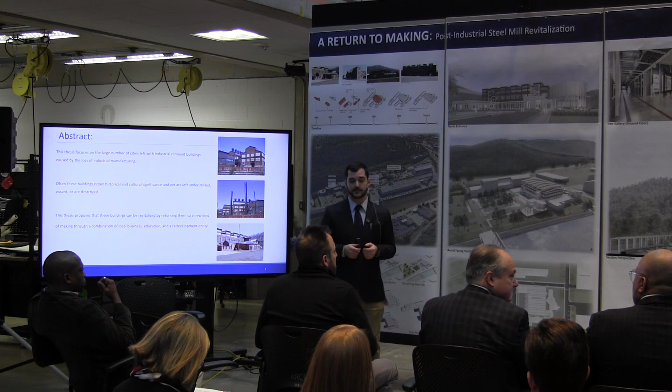So to start off, this thesis is about adaptation. It focuses mainly on a large number of industrial cities that have been left with remnant buildings as their industry has failed or gone away. Many of these buildings hold historical and cultural value for that city, but are left underutilized, vacant, or destroyed. This thesis proposes that we can revitalize these buildings through new programs such as educational, business, and maker spaces. As a case study, we'll be using a steel mill machine shop in Johnstown, Pennsylvania.

For an overview of what we're going to talk about: we're going to start with the site, some site analysis, building analysis, move on to the design solutions, and then follow up with where this could go on site, as well as other places.

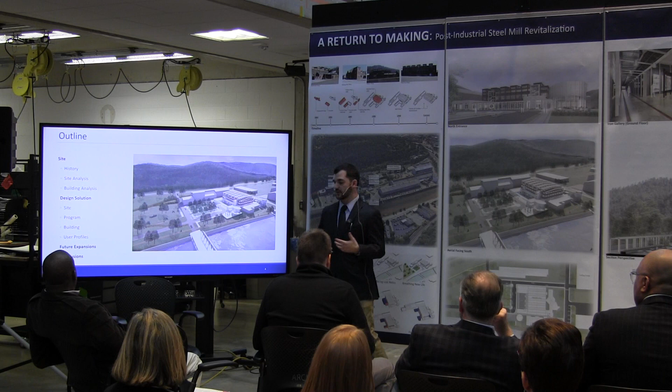Johnstown, Pennsylvania was left with over 200 industrial acres at the end of the steel mill era. These 200 acres were spread across 4 separate sites. Specifically, we'll be looking at the Lower Cambria area, which is the oldest site and home to the Cambria Iron Works. Additionally, this site is a registered location.

The site to the south is the Johnstown Welding and Fabrication buildings, which basically make parts and custom fabricated steel products. At the center of the site are 4 main buildings from the late 19th and early 20th century. 3 of the peripheral buildings are being occupied right now by the Center for Metal Arts, which is basically a learning center for blacksmithing. At the center of those is the machine shop itself.

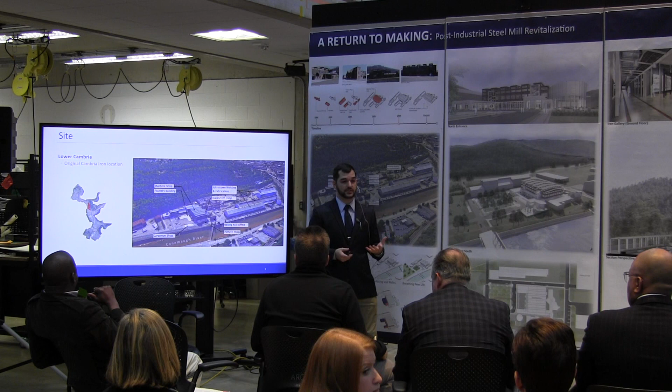Additionally, there were 2 buildings that were left at the end of the steel mill era when it closed. However, they have been destroyed since then.

In 1793, Joseph Schantz established the town of Cambria in Pennsylvania. Soon after, they would rename the town after him, but due to mispronunciation, they would call it Johnstown instead of Joseph Shantz.

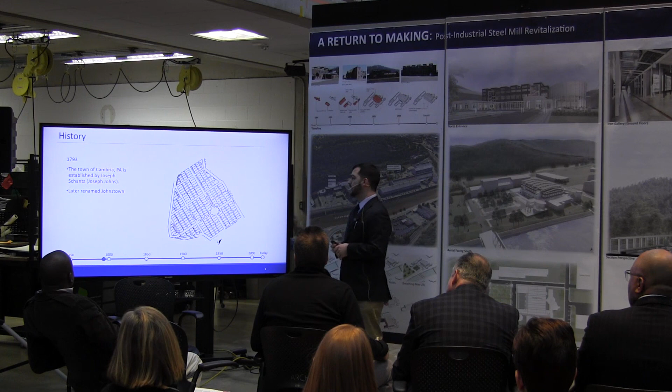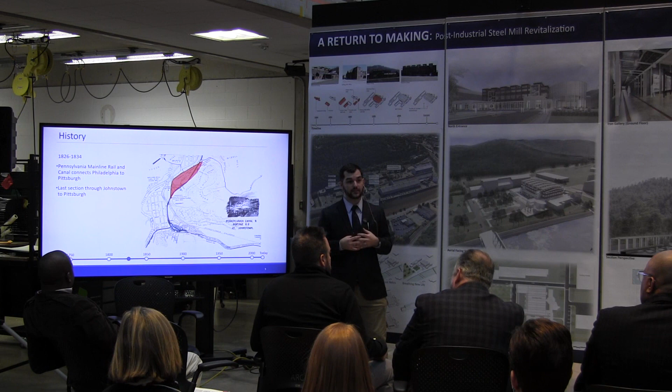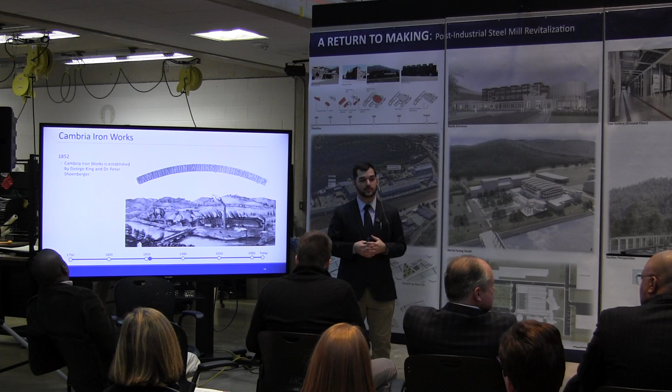In 1852, soon after the canal system, the Cambria Iron Works was established. This would later grow to become the largest steel manufacturing plant in Johnstown.

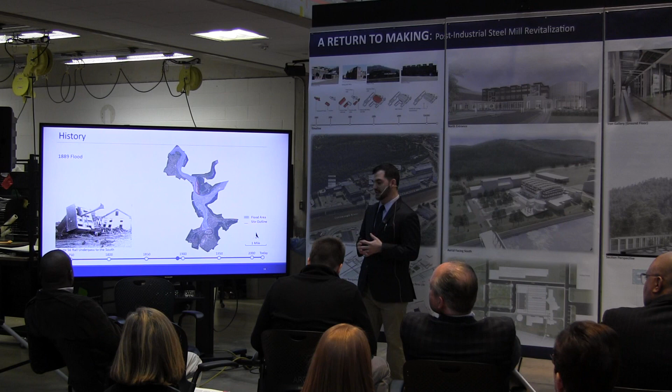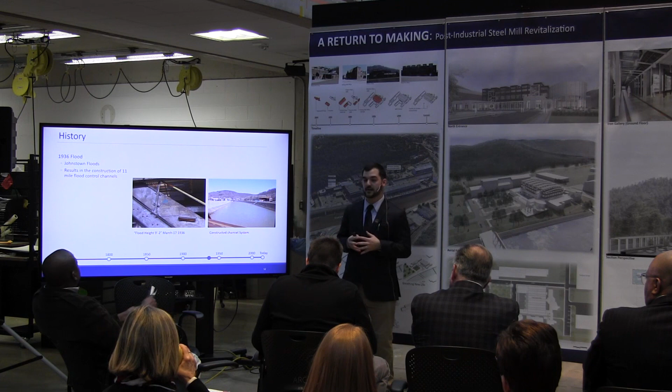Unfortunately, in 1889, due to the collapse of the South Fork Dam, Johnstown flooded and killed over 2,000 people in one day. The city would flood again in 1936, which would result in the construction of 11 miles worth of a channelized river system.

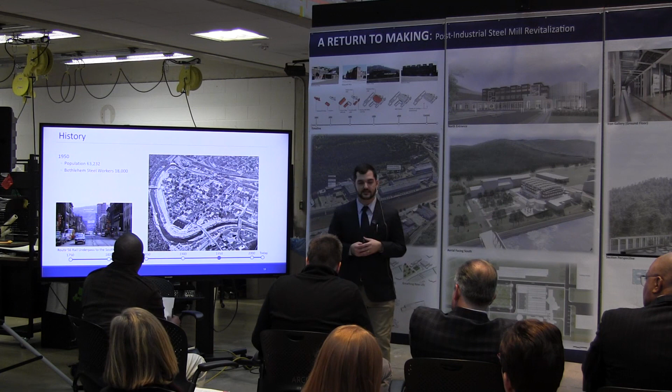That brings us to 1950, at the height of the boom of Johnstown. At that time, the population was just over 60,000 people, with 18,000 people being employed by Bethlehem Steel, which was formerly known as Cambria Iron Works.

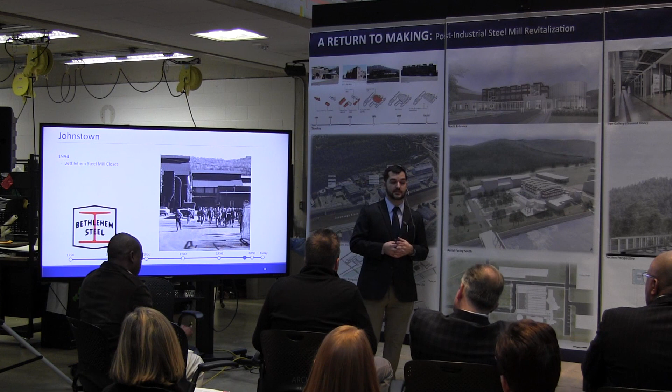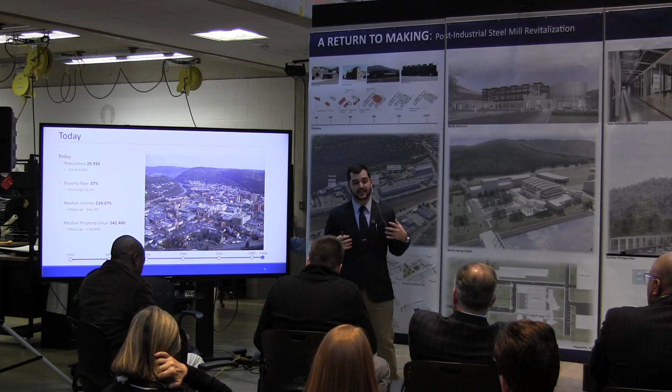That leads all the way up to 1994, the end of the steel mill era in Johnstown, when the mill closes. This leads to today, where the population is 1/3 of what it was in 1950, and this has had a tremendous amount of economic repercussions to the city.

Focusing on the site of Lower Cambria, it is located at the confluence of two rivers. Just to the northwest is a series of low-rise commercial buildings, churches, and some residential buildings, as well as, just to the south, the center of the city.

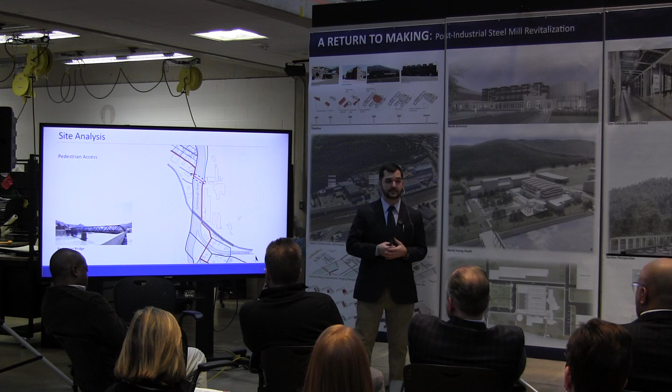Pedestrian access is primarily through a bridge that was constructed in the late 1800s, to allow the workers to walk and get to the site from the adjacent housing places.

That leads us to other forms of transit, primarily through the Amtrak station to the south, just across the rail viaduct, as well as a number of bus stops that would stop at the pedestrian bridge.

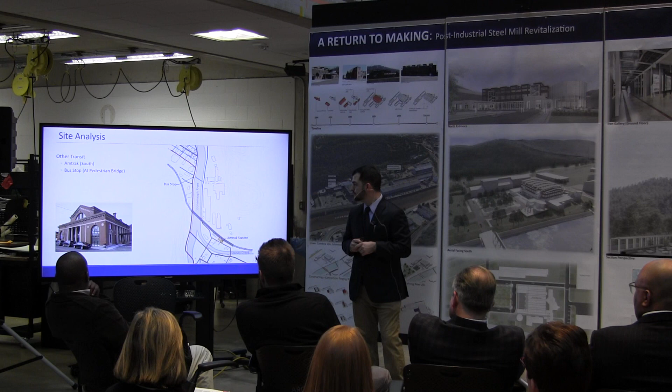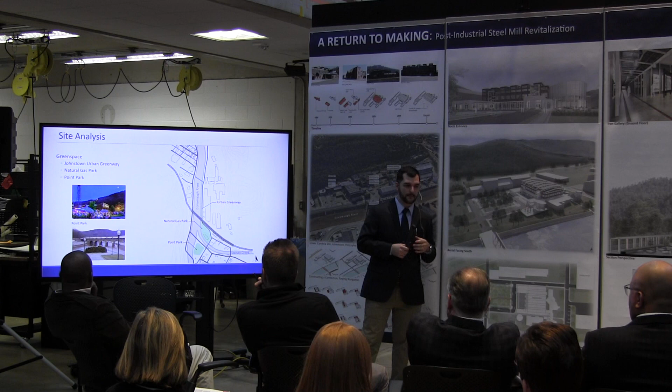Green space surrounding the site has three main forms: a green space, or the urban greenway, which snakes along the river's edge and the site, then down into Natural Gas Park, with Point Park across the river from there.

Looking at the machine shop, it has primarily been left vacant since the end of the steel mill era, and provides a large space at the center with a cathedral-like plan, with a bay at the center and two side bays that allow for additional floors on the ground floor.

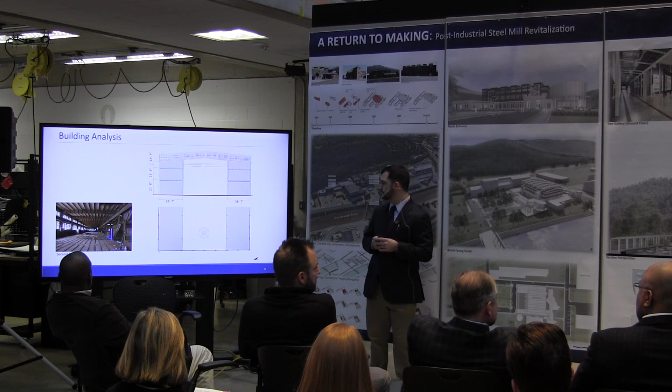Moving to the site and the solutions for it, there are four main objectives. The first is constructing a connection to the site, since it's very difficult to get there and very isolated. This is done through a bridge connecting to Route 56, as well as rerouting Iron Street so it can be wider and easier to navigate.

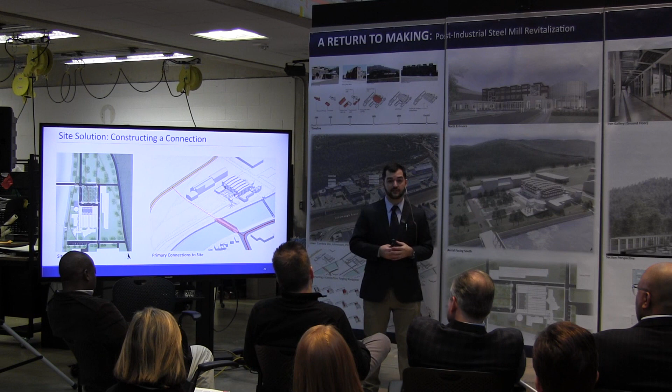Additionally, constructing a navigational system of streets on the site to provide more access to the buildings.

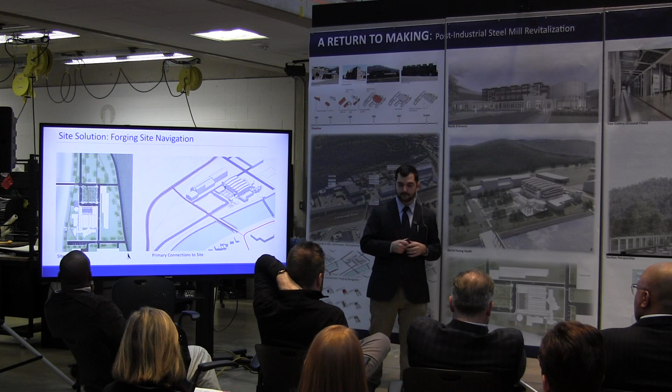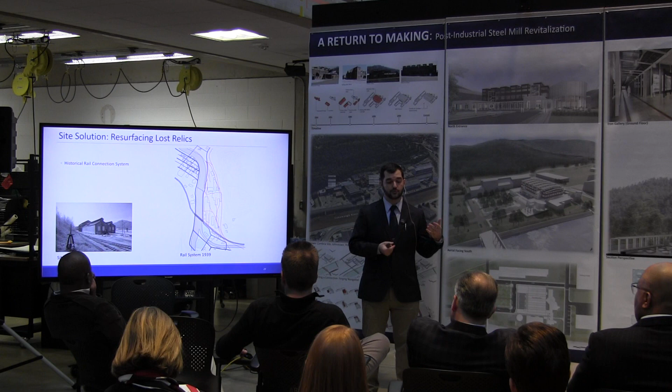Another objective was resurfacing some of the lost relics on site. Looking back at how the site was navigated through rail, they primarily used cars on rails to move all the products, the heavy steel, in and out of the buildings there.

Using this to then create another network of pathways, both vehicular and pedestrian paths, as well as plantings and some planter beds.

The site, being industrial, has little to no green space. So providing green space in the form of a pervious pavement area, which can serve as a place for farmers markets, as well as overflow parking for any events inside the space.

And then to the north, providing a sculptural garden space for any of the things that might be made inside, or any artistic things.

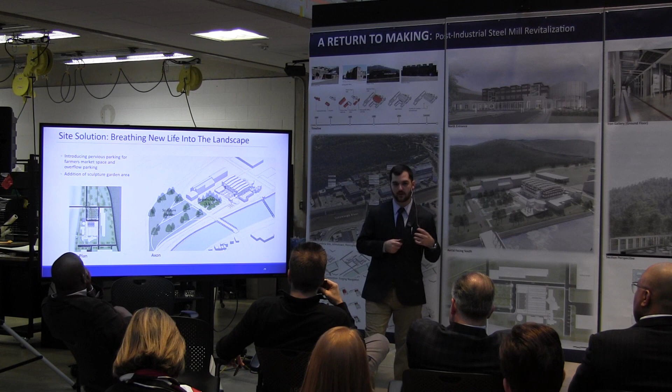Moving and transitioning to the building and solutions there, there are three main constituents for the program: using an educational system, the redevelopment authority in Johnstown, and bringing together corporations such as maybe the Johnstown Welding and Fabrication plant that's on site to use this space.

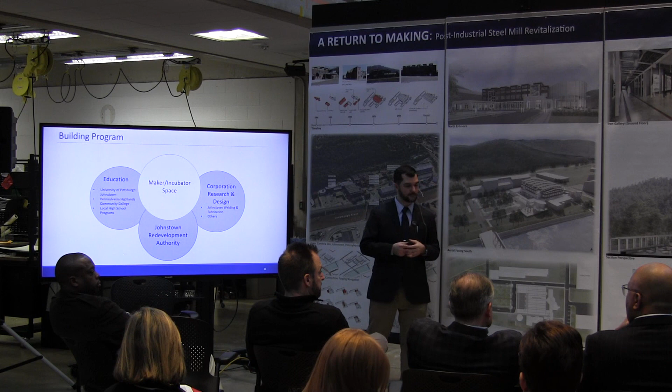Looking at the building and how to adapt it, how to add spaces to it, or implement and insert this program into it, I came up with a series of different ways we could do that, which led to two different schemes.

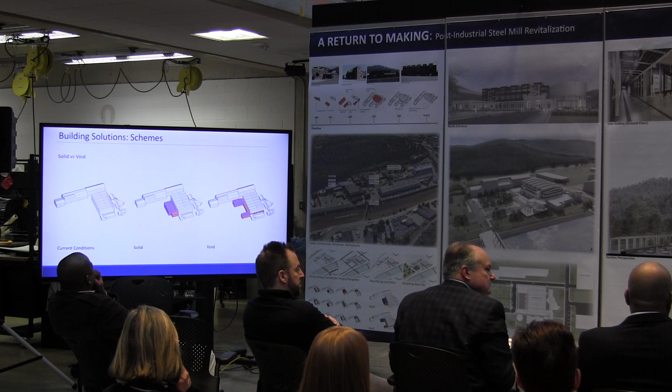They're mainly called these because of the response to how the foundry building, which was formerly adjacent to it, was treated—whether it became a void or a form, or whether we recreated it as it was.

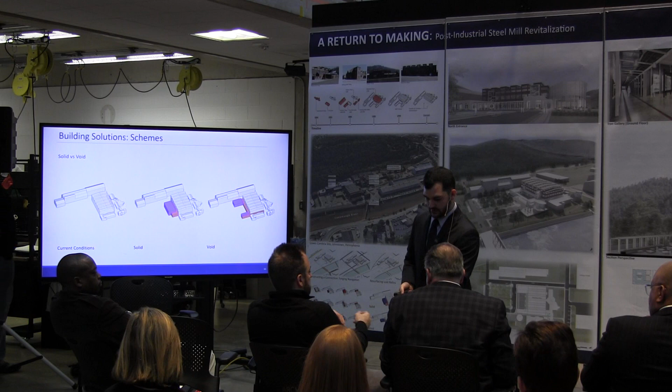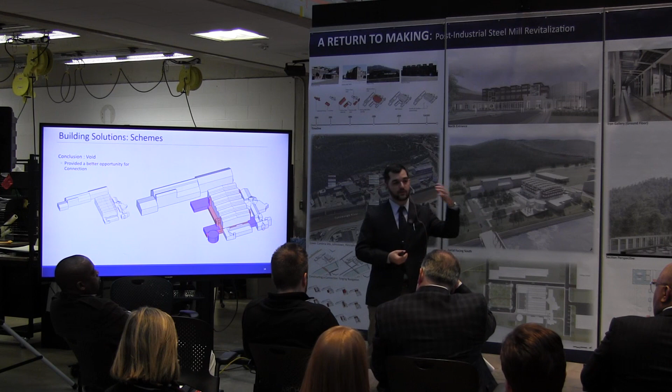I created a couple models to look at this. This led to the void form producing a better opportunity for connection between the green space to the north and the industrial side of things to the south.

Moving to the building objectives and what I wanted to achieve in the building: it starts through this connectivity, creating a long axis that runs from north to south, allowing anybody who needs or wants to walk through it to get there, as well as providing a means of travel to the spaces they need to reach.

Additionally, providing another axis on the periphery of the north side of the machine shop from east to west.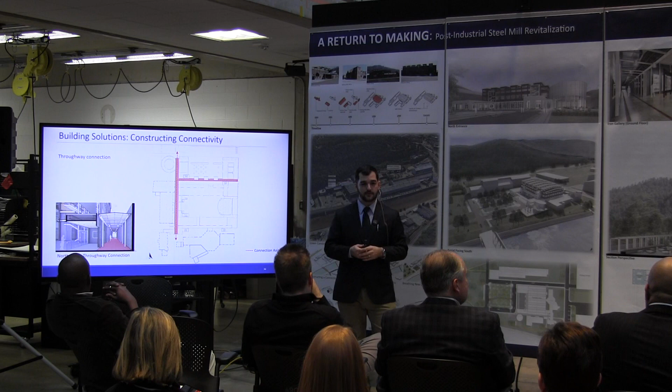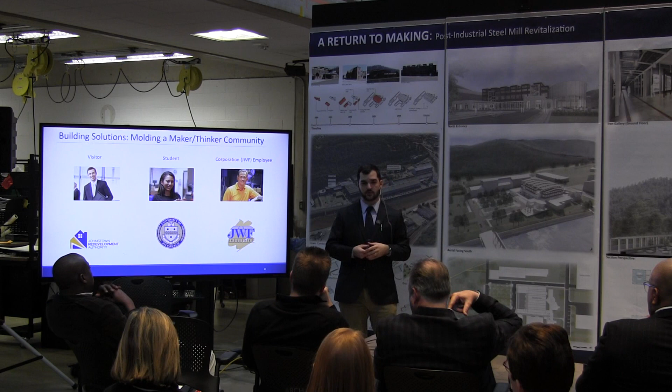So just to look at the community that's going to be in there and who's there: visitors, anybody that's coming to a large event space that's going to be in there, as well as students and JWF employees or business employees, startup companies, stuff like that.

Mainly you would start by coming in the north for most people, and you'd be greeted by the Steel Gallery or the cafe that's there. Then you could move across to the opposite side of the foundry court, where there's a shared workspace for any startup companies that would like to take place in this building.

And then at the center and at the heart of this complex is the steel hall that provides a vast, large open space to hold any kind of conventions or to serve as a breakout space for the maker spaces that are on the periphery of that large space.

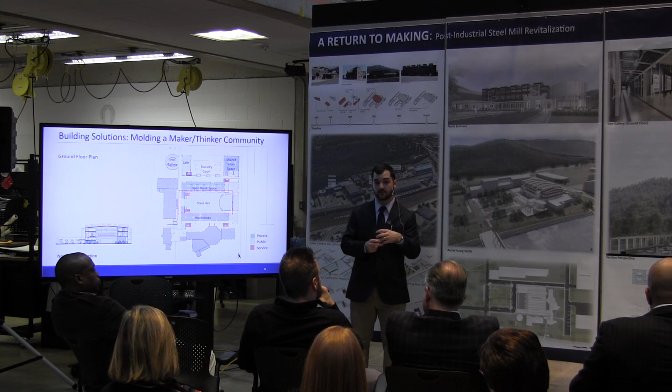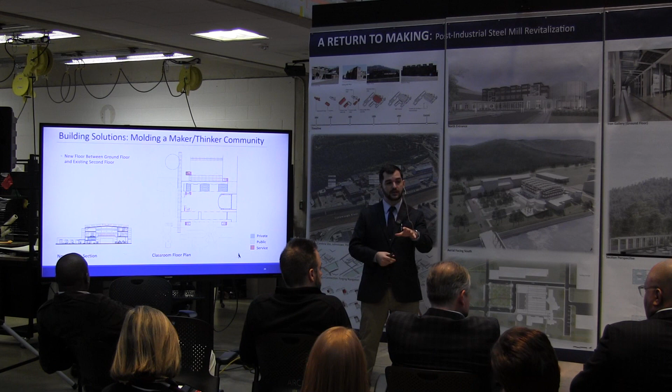So then moving between the ground floor and the second floor, the existing second floor there, a floor was added to the north side to provide some educational spaces that allow for connectivity. It's a catwalk-like space, which I'll show you a little bit later, that you can see the connection between what's going on inside the classrooms and down into the open workspace where people are assembling any kind of projects that they have.

And then this would move up to the second and third floor, which are outfitted with a flexible office space, which we'll talk about next.

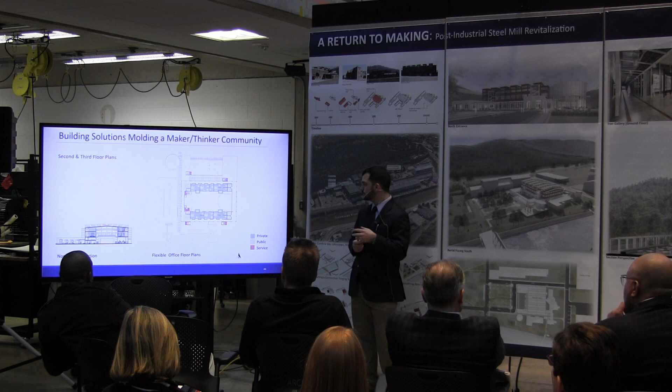So to start that off, I want to look at the way that this thing was constructed. It was primarily constructed with riveted steel columns and beams with a brick facade on it, and concrete roof and a concrete floor. These basically have no insulation value to them.

So providing a space in which we can condition and add an envelope inside these buildings for the office spaces that are there.

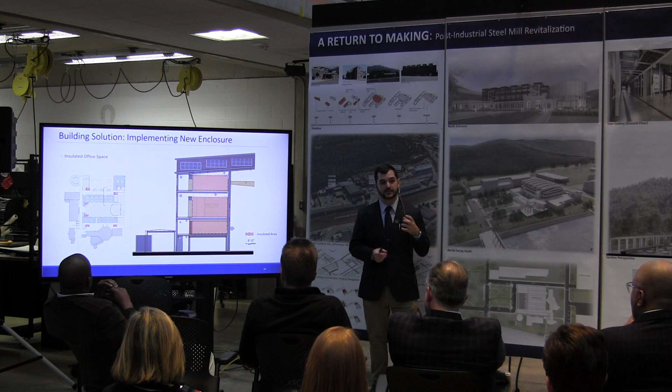This is constructed through 6-inch structural insulated panels, then moving to a suspended ceiling from the existing structure that also has insulation on it. Then providing a raised access floor that gives any kind of services or access to any services and allows for flexibility throughout these spaces, and additionally some insulation completing the envelope.

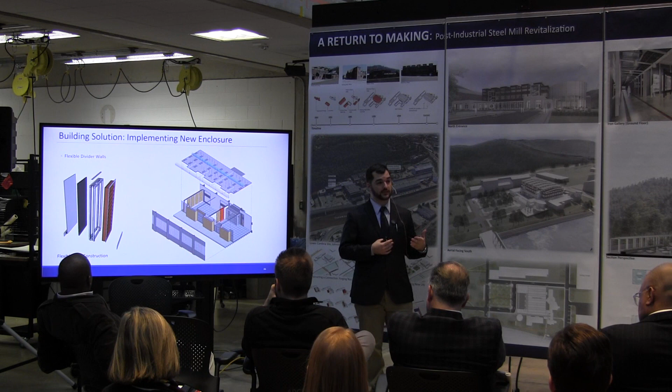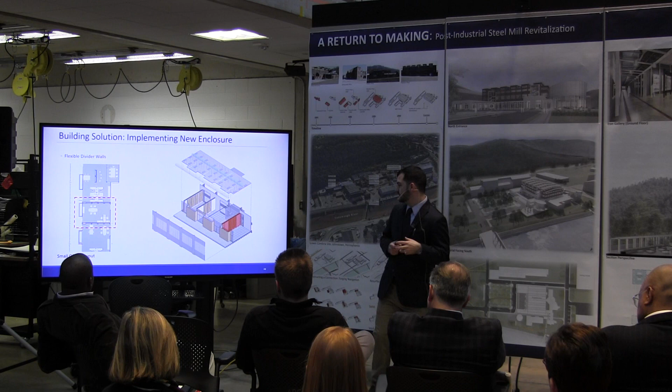Within these office spaces, I was looking and trying to provide some flexibility within them, so developing a wall system that can be moved and easily adapted as the building grows and contracts. These wall systems are primarily made out of some baffling and some steel structure there, but are left on casters and have a locking system on the top where it will lock into a C-channel in the ceiling.

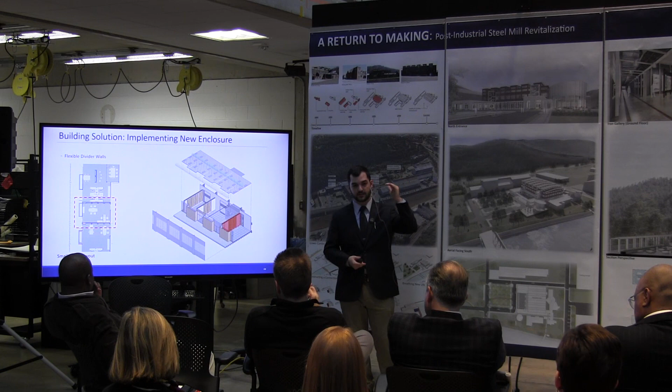So then moving to the last building solution, primarily this is trying to contrast what's going on from the old and the new. To do this, again, looking at the weathered and worn structure of the brick, as well as the riveted steel, I contrast that with the warm feeling of the wood and the wood texture, as well as some concrete on the base floor, creating a base there, as well as adding some additional glazing and contradicting the steel structure that was existing there, which was riveted I-beams with a tubular system or hollow steel system.

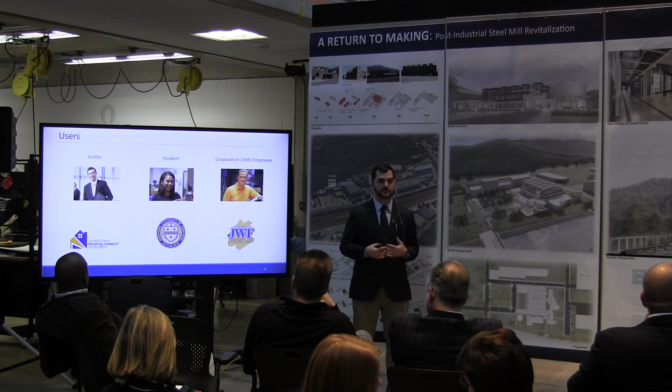So going back to those users and how are they going through the space and how are they using the space? We'll start off with the visitor who's going to enter through the north entrance.

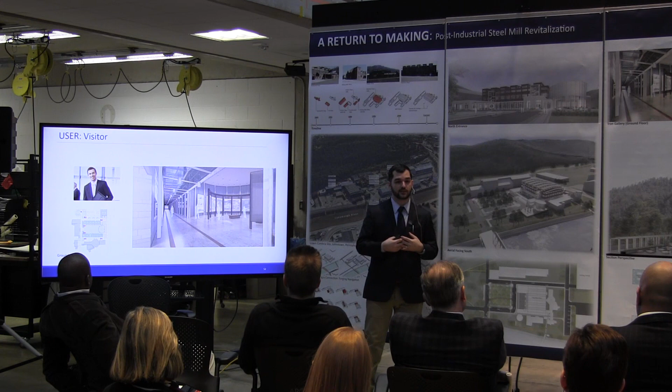Then they're going to be greeted by the steel gallery where they can enter and see how this space used to be or used to function. They can see all the activities that used to be there through images or any other artifacts, since there's an abundance of museums within Johnstown, so they would be easily used and traded for.

And so after they're there, they can then move into the large gallery or steel hall, which would provide a space for any kind of conventions that they're most likely attending.

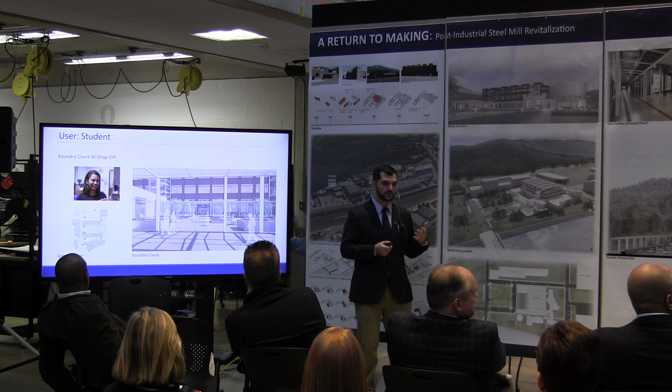So then the student, and how are they navigating this space? They would most likely be dropped off at the Foundry Court. Then they would enter into this space that serves as a kind of open workspace where they can go get their coffee, sit there and work and study a little bit, as well as any of the other people, the business people, individuals in the space can use this also.

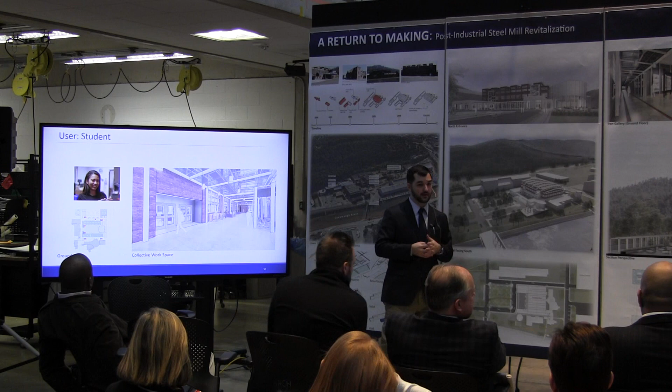Then they would move up to their catwalk system that I was talking about before, where they're raised above a workspace down below. With a high bay and low bay system between these classrooms, they can see into the classroom through some of the glazing, and then down into the space below and the projects that are going on.

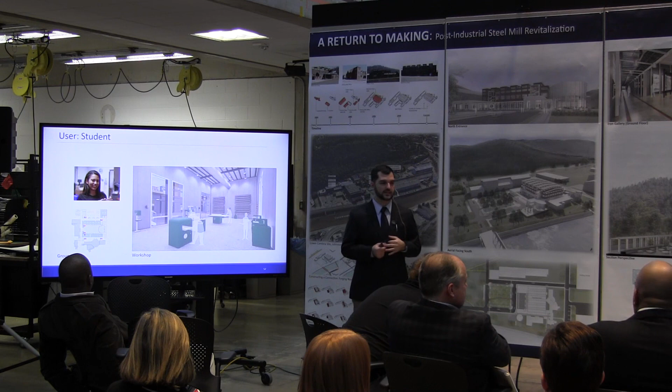So after they're in these classrooms and have had some instructional time, they can then move to the workshops, which there are two types of: a steel workshop as well as a wood workshop. Additionally, there would also be some 3D printing spaces in the building.

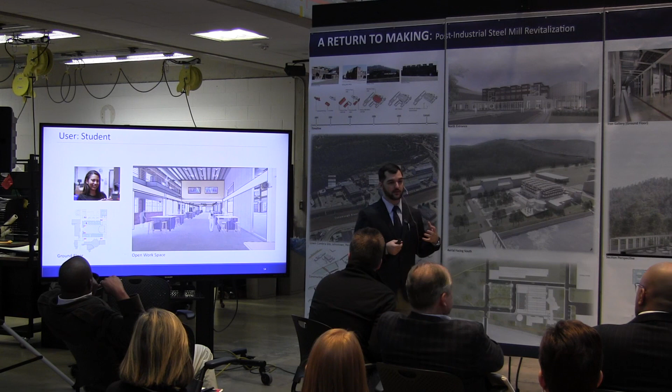After they've constructed or cut out these pieces, they can then go over to the open workspace where they can assemble whatever their projects are, or work together with any group members, using some of the hung marker board systems that are movable, as well as any of the breakout spaces.

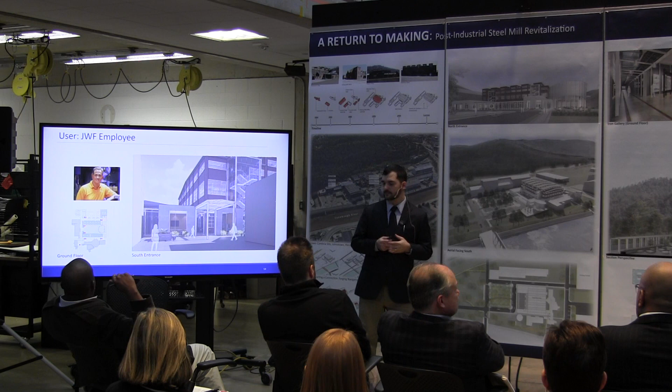So the last individual we'll talk about is the corporate employee, and they would most likely enter through the south of the building. They would then move into their flexible office space for a while, and then maybe that day they have an instructional learning event, and they can use the space inside Steel Hall as a presentation space.

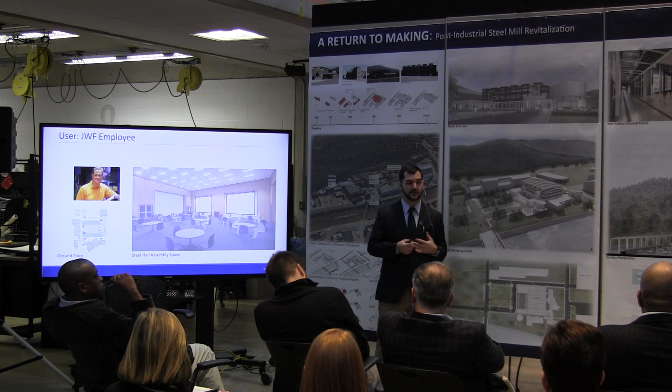So wrapping up with that and looking at how we can expand into the other buildings adjacent to there: most of these buildings on the site are similar in construction to this building, although they may be a little smaller. You can utilize the modular, flexible office system that provides an envelope in these buildings, as well as these buildings lending themselves to the makerspace kind of program.

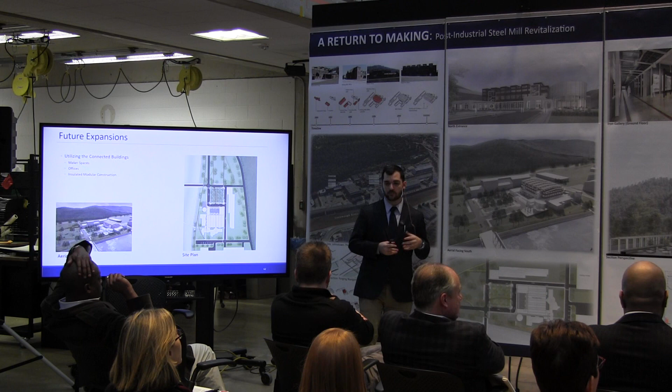So wrapping that up, this thesis has provided a means in which we can revitalize these post-industrial remnant buildings through the implementation of an educational makerspace and some business incubator programming. Thank you.

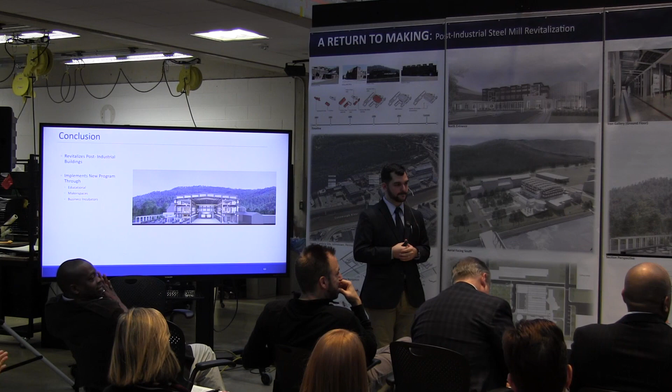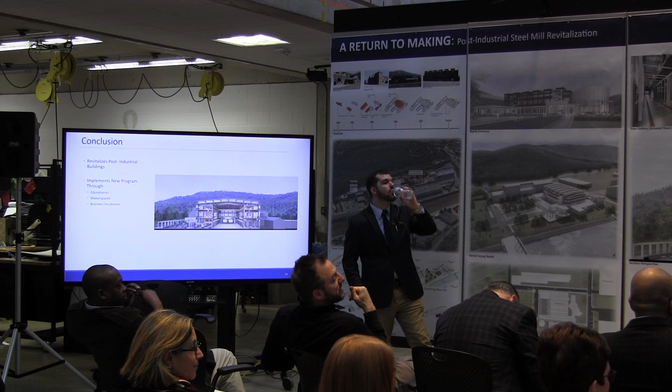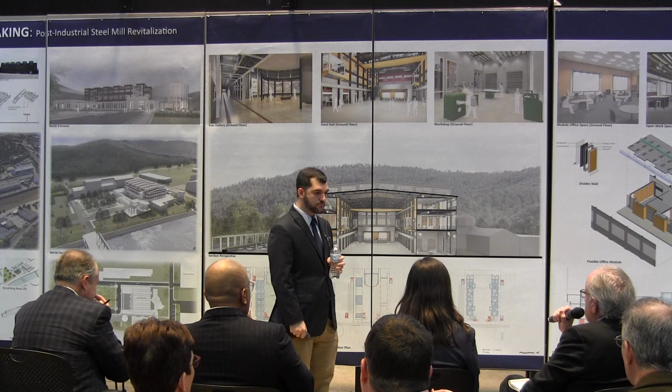In general, it's a very nice project. I do have some questions about that main space in the middle. It's how tall, 60 feet? It's like something 72, 70, something like that to the highest peak. How tall is this space?

Good question, I never measured. But it's shorter than what I have, I can tell you that.

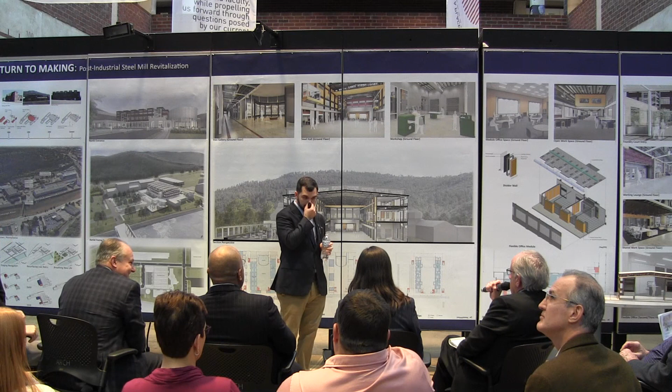You talked about that space being for breakout as one of its major reasons, but on the upper floors you put the circulation on the outside face and not the inside face. And as we've noticed here, that hallway is a major breakout space—it's where people leave the classrooms and look back down into here. It engages the upper floors and, for better or for worse, the breakout space. I'm just wondering why you put the circulation on the outside.

So putting the circulation on the outside, I think, was a way that the exterior walls weren't conditioned as well, and so to leave the aesthetic of what the existing structure is there, so that you can walk past these walls and see outside, additionally into what would be the court out here. So you get a view outside instead of, and additionally not touching the existing structure as much. Moving it to the other side allowed me to not impede upon the existing structure as much as what would be needed if I moved it to the opposite side.

So these walkways on the outside aren't conditioned as well as the ones on the inside. However, to provide views, there are these what used to be loading bays—overhead cranes would come over and drop things on there. So there's a conference room or an office that could be there, as well as it all provides a number of glazing along it that allows you to see into the office. I think that's a fair answer.

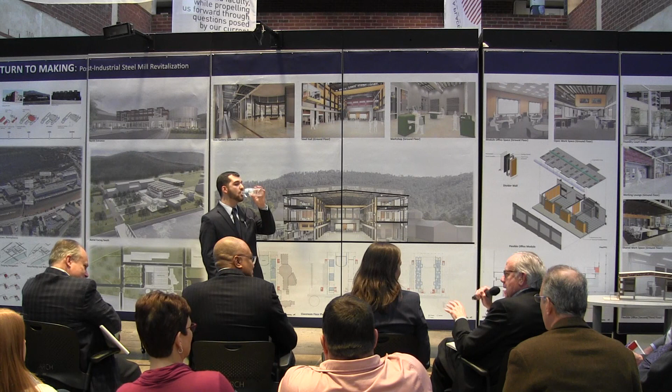So the comment you made about having been to the steel plant, we also went there when I was a student here. You're kind of bringing back memories as you talk about this. And it's funny, my major memory of being there was how many people working there had less than 10 fingers. I mean, it was a brutal place.

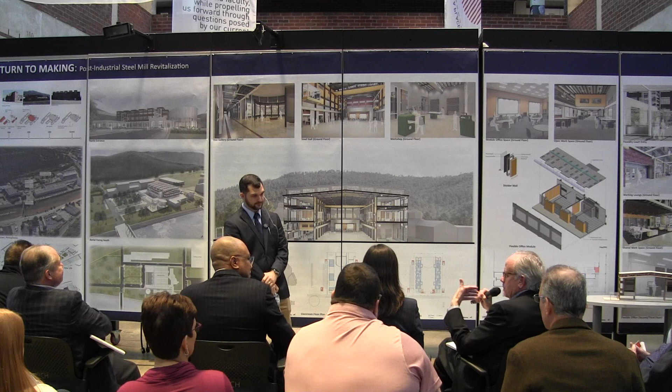It was, yeah, it's nice, and it's been cleaned up. And I'm wondering, it's one of these things you deal with when you want to clean and sanitize history—where do you cross the line where it becomes something very, very different? And I think it's too sanitized.

I'm not sure the floor looks like a very light terrazzo—I'm not sure that's the appropriate floor. What you have inside the space would be left with the existing floor? Yeah, it's meant to be left, so out here it's a polished floor, but when you get in here it's still the rough floor. What's that material—concrete? Yeah, it's rough concrete.

The renderings don't show that—did the walls look like this inside the space? No, so they wouldn't have that color; they're all concrete, or they're all brick. So anything that's not a brick wall is a new intervention.

My point is, all I can think of—this is going to sound odd, because again it's a nice project—is that it kind of has that food court feel, overly clean, overly large, overly bright. Maybe the lighting shouldn't be quite so bright; it needs something a little grimier, something that talks about how brutal this place was when the steel was actually being made. It could just be a function of adding a little more grit to the rendering.

It's interesting, because I was recently on a jury for a museum award—not really an architecture award—and two of the submissions were the Brooklyn Historical Society's Dumbo space and Mass MoCA's Building Number 6 in North Adams, Mass. What both of those projects did really well was leave artifacts of the people who used those buildings when they were industrial.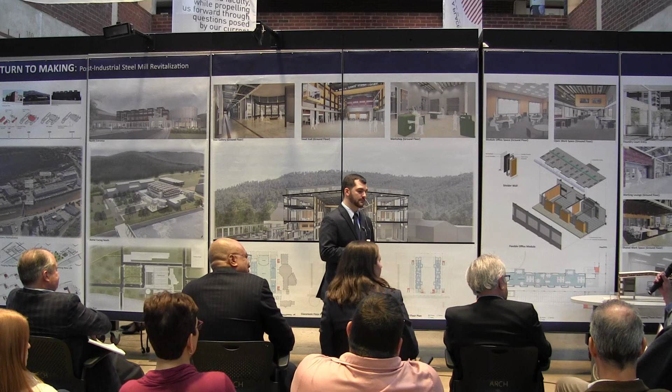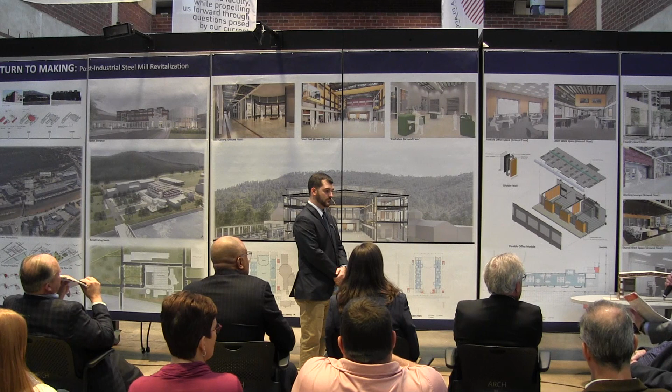Not to sound like a broken record, but what your project is missing, and otherwise you've done a lot of good things very well, is detail and materiality of your interventions. I keep getting drawn to the center drawing there, and the mustard color wall, or whatever it is, that I assume is something you added, right? Between the steel grid, which I assume is original, the vertical grid, whatever. I think it'd be interesting to divorce your mustard yellow walls from the steel and let the steel say this was an open steel thing, and then make that wall out of cable netting truss, glass panels, spider fittings, something really of today and high tech, to contrast it with your century older original stuff. Leave the chips of paint on the brick walls and on the interior and stuff like that, and really play off today versus history, and just think about some of the details. It would have made for a much stronger, more interesting project, and would have given you a reason to not put the balconies on the interior part.

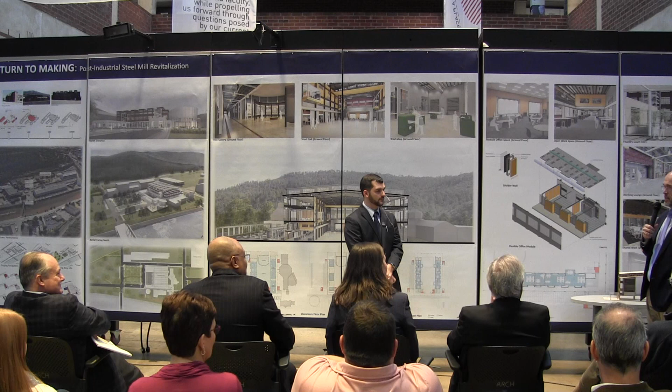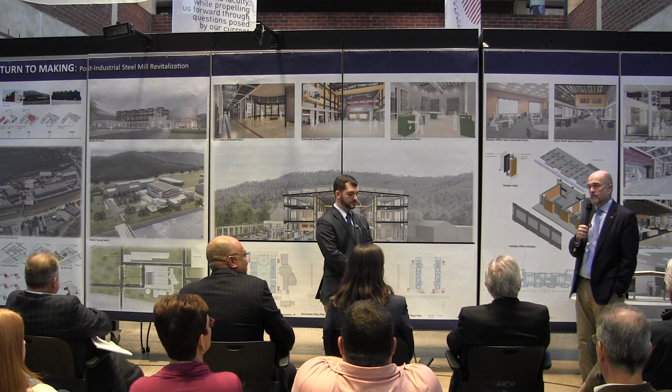Ryan's thesis, I think, brings up a lot of interesting questions, and I hope that some of you out there about to do thesis, if you're doing a thesis that involves adaptive reuse, my poster boy here, Ryan, will tell you: find documentation about your building now, build a robust model now, do that, and you'll be able to address a lot of the issues that came up here today. We were about halfway through the semester before we really had a robust model of the building where we could actually visualize what was there and really understand what was going on. That really kind of impeded the progress on a lot of the issues, and certainly it didn't allow us to get to the much more tactile issues of interrogating how we're doing infill throughout the building.

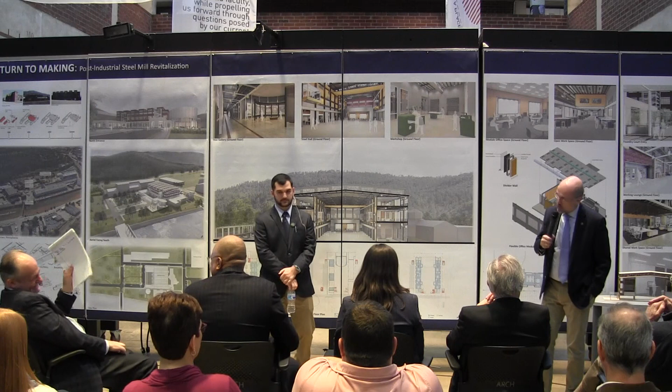This has been a triumph, though, Ryan, for you. You've pulled this off despite, I mean, there was a period of time where Carl and I would go behind a closed door after meetings and say, is he going to do it? Could he possibly do it? Is there any way he can do it? And you've done it. You've pulled it all together. Sure, there are a lot of issues that could have been pushed further if a lot of the documentation had been done earlier. But there was also an aspect to your process that I think also made it a little difficult. I just point this out not only for you, but for others: I don't ever want to play poker with you, because you keep your cards really close to your chest. You'll put one down for me to look at, and then you pick it up real fast, and put another one down for me to look at, and then you pick it up real fast. You rarely lay them all out like you did with that one drawing which showed all the schemes, which was before we knew what the building was about as critics. So figure a way to share more of that earlier on.

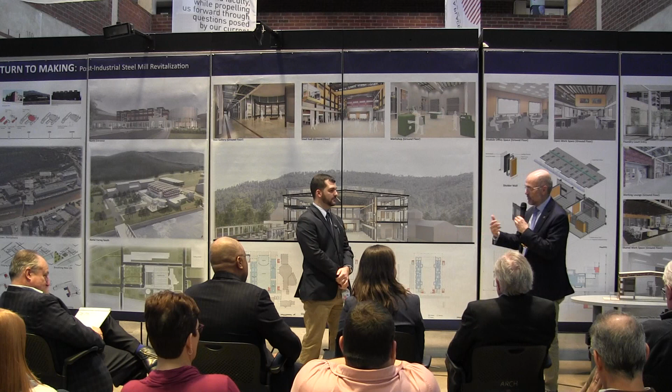Know that we're not here to threaten you, that the people you work with, you want to be able to share your thought process with. Ryan didn't want to get up here in front of you today. And Ryan has, I will say, made more progress, thanks to you, more progress in terms of putting together a presentation than anybody I've worked with in the past. I just really want to thank you very much for just keeping a good face. You took it on the chin several times from me. I was pretty rough, but you did a great job, buddy, and I respect you for it.